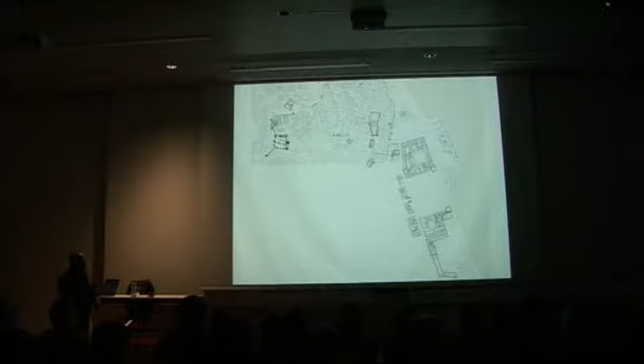This drawing shows the monumental scale of the main square facing the water. You can see that this space, even if it's not so big, the two houses we are going to see were in the 11th century very important in Lisbon, because it's the main space of the city at that time. This is the main church.

This was the situation the first time I went there. They found the remains of two houses, Islamic houses, with patios you can see here. The archaeologists had remade the walls, because the walls were almost nothing, and they made them freely with the same stones they found all around, wanting in the competition a protection for these two houses.

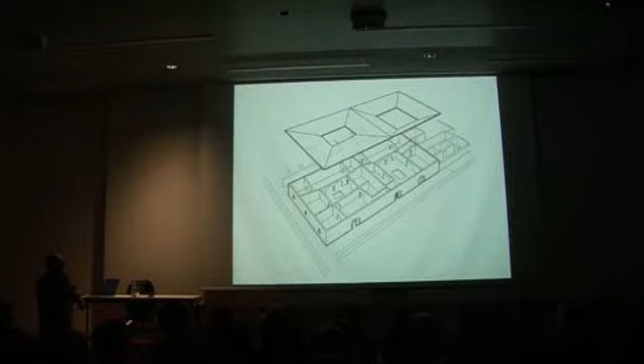This is the model of the existing excavation. Here you can see the two houses. This was a drawing by the archaeologists, a kind of conjecture of what the houses were, and we thought it was interesting with a certain abstraction of some of these details to protect the ruins with a very big model in real scale that can make us imagine the inner spaces and the patios, and also protect the ruins that exist there. Since they found frescoes in these very big rooms, these rooms must have been beautiful, and it was very important to protect these spaces.

So this is the first model we have made. The idea was to build this in a very light way, as if supported by 6 points where we had not found the remains, and with this to explain the houses that existed.

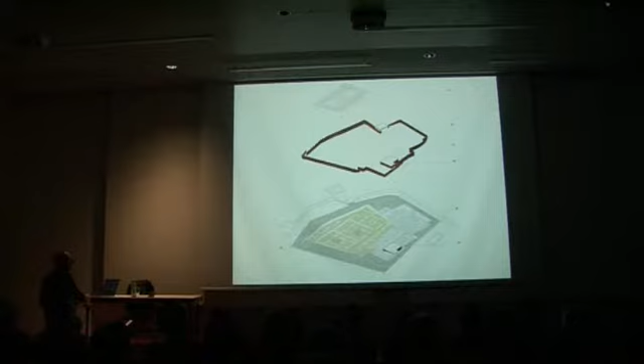This is the drawing of the two houses with the patios, and this is the wall to define the space we were going to display. This is a space to walk around, paved with the stone of the city. A more detailed plan. A more detailed model.

It's very important that the existing walls are very well protected, but the structure is reversible and never touches the existing walls. After construction, we have always 15 centimeters between the existing walls and the model we have made. And this is the system to protect the difference of levels. This is a very beautiful space with the castle all around. We arrive from stairs that exist here, and we see this space from the wall.

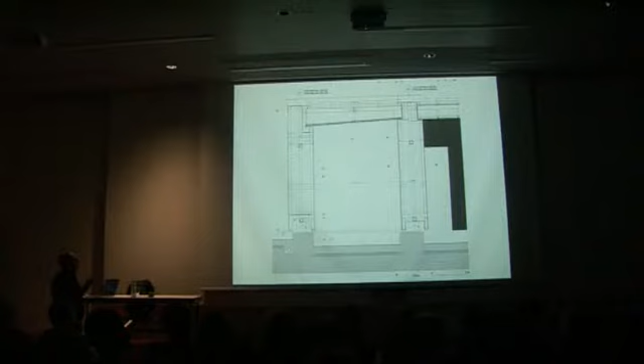During the construction, usually at this point, everybody thinks this is not allowed. And finished. This is the competition. Now I finished the construction project, and next year maybe it's going to be built.

Now we were in the castle in Lisbon, and this is the intervention area for the competition for the cruise terminal. This is the area we have seen in this plan of the 17th century. It was inside the water, in the same plans we have seen.

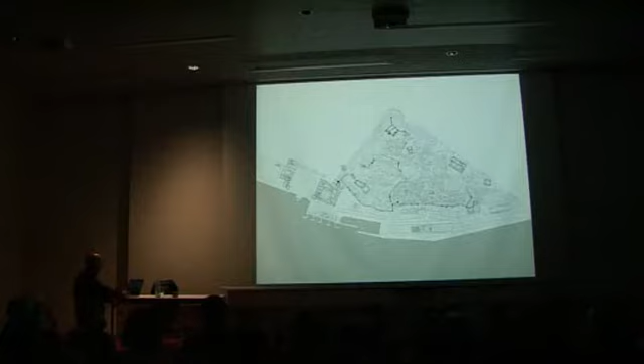Also these spaces we are going to build, when the cruises are not arriving, we can use them as spaces for other activities. This is the ancient city, a kind of amphitheater or auditorium looking to the water, to the river. And the idea was to inverse this site and to put the building looking to the water and also to the old city.

I thought this was an occasion to create spaces mostly for the city, to reveal the presence or the memory of the dock, and to do the building with a very big freedom, because we were inside the green park and beside the water.

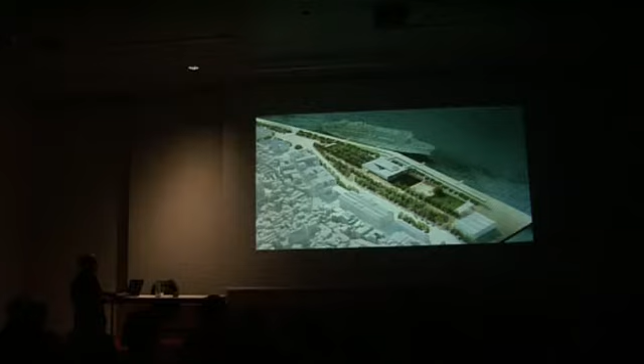These are some drawings of the competition and photographs of the models. And this was the other photo montage they asked for, to understand the relation of the building with the ancient city, that is very beautiful, as you can see.

And these are always images from the competition that are now not completely updated. But we can imagine that the relation between the ships and the city is much more important than whatever we are going to build in the space between.

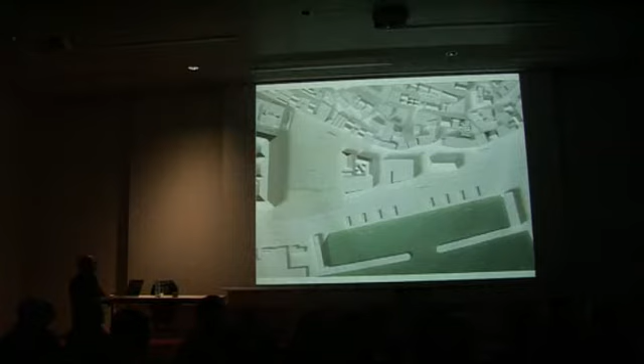The idea is to protect a little bit the square from the traffic noise, and then to create a space with pine trees, with this opening to the Saramago Foundation, and with the very different trees on that side. These are the volumes that now we are not going to study, that they are not going to be built. And what we are studying is a parking area only a little bit underground, but that creates a kind of protection to the noise of the road. And then this inner space very open to the river and to the city.

This is a section in the competition with the pine trees. And the other section here is the river, and you see it's a little bit deeper, the square with the pine trees and the different trees the other side.

This is the bookshop for the Saramago Foundation, with this caryatid that is an elephant. This is the form of the square and the bookshop.

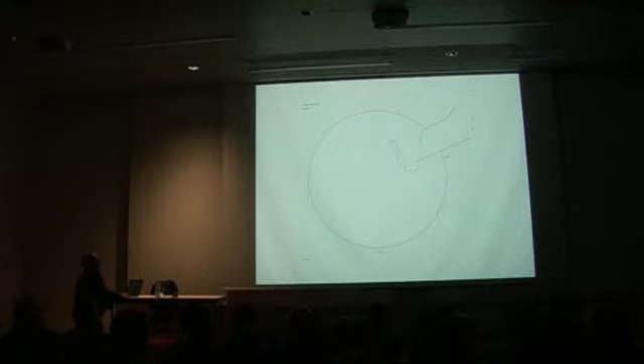It's a very simple figure, let's say. The base was built with concrete, but separate from the pavement, and with lots of things inside to be easily demolished. It was put in place during the night, and in the morning was like this. This is a beautiful site.

And then we put a very light structure with a kind of plastic mirror. It's a film that reflects, and it's in tension with this frame, this steel frame. As you can imagine, it was a very big attraction because people from the outside, in the mirror, they seemed very elegant, and inside they were very, very fat but very happy. The effect was incredible.

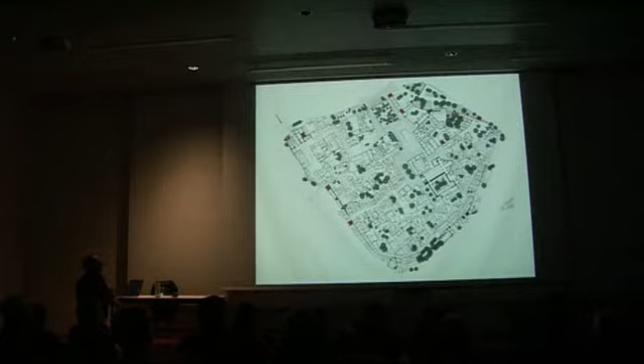This is the plan we have made with all the ground levels of the buildings of the city, with the wall. And this is the area of the Roman temple.

We thought that it was interesting to introduce the pine trees and the cypresses to create a kind of image that we can see from the outside, and that creates a kind of clear image like the old cities in the Mediterranean area. In the upper areas, lots of times they have this kind of trees. And we thought it was very interesting to begin with this.

The temple, in 1037, was built and rebuilt, as you are going to see in the next image. And in the 20th century, they demolished everything that was not Roman. And the ruin remained like this. It's beautiful. This is an ancient photograph.

But since it has a very important position in the center of the old city, it has a very strong presence. And this was an ancient photograph without the stones all around, with the earth, with the stones. But we always see that something of the ruin was maybe not so correct, because the ground was maybe here at this level.

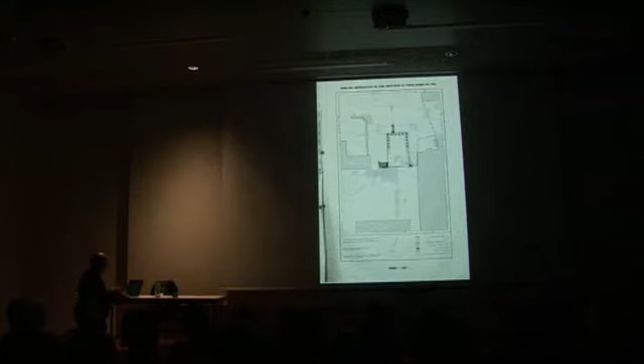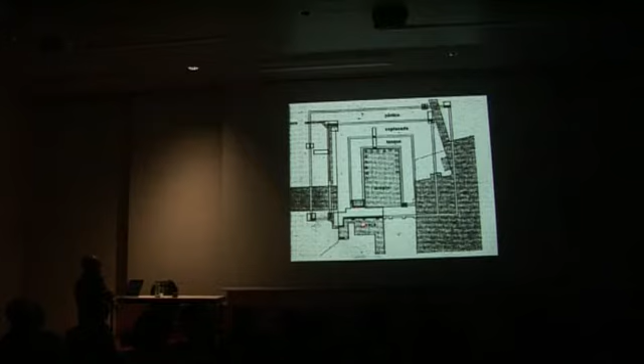This is another drawing of the archaeologists trying to understand the space. These are the excavations they have done, trying to understand the space in Roman times. And this is the only photograph we have of the excavation with the tank.

We thought that maybe this idea of reflection was really interesting. This is the actual situation. We would like not to have this and to put the protection at this level. We thought that maybe we can do it with a kind of artistic installation.

If we keep everything that is underground and we put a kind of steel tank with very little water exactly at this level, but in a reversible and ephemeral way, just as if it was an artistic installation there.

This is the model we have done. The idea is to go down one step from the stone to the earth that surrounds the temple, and then to have this kind of mirror made with water that reflects the ruins and protects also the ruins from the intrusion of tourists.

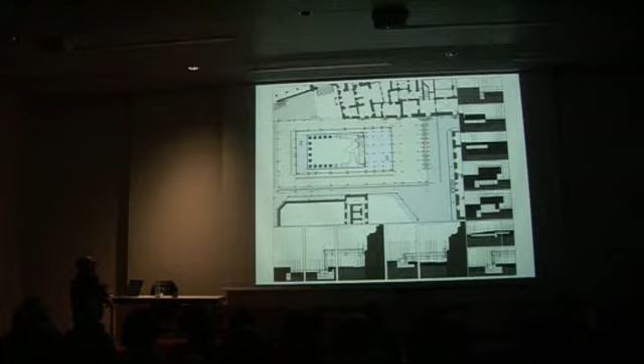The city of Covilhã is between the mountain and the valley. They asked me to work within a plan made by an architect from Lisbon, in his 90s, whom I like very much. He was doing a plan to create the possibility to walk in the city using means like a pedestrian bridge, instead of having to use the car.

This is a kind of schematic explanation of the project, where you have the mountain, the little valley, here the historic center of the city, and then the huge valley, Cova da Beira, that is very fertile, which we are going to see.

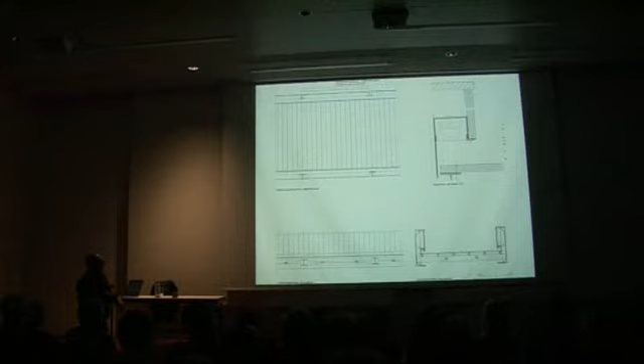During construction, now you can see a little bit of the huge valley, built and rebuilt by man with walls of granite. In this picture it does not seem so beautiful, but it really is. And this is the side of the historical center, which you cannot see because of the banal buildings all around.

Here you see the bridge with the mountain and the valley. The bridge is painted white, 225 meters long with columns 1.70 meters. This works as if it was a sheet of paper with these impossible dimensions, because on the intradorso of the bridge you have the black color.

And these are the ugly columns that are going to be recovered by nature one day.

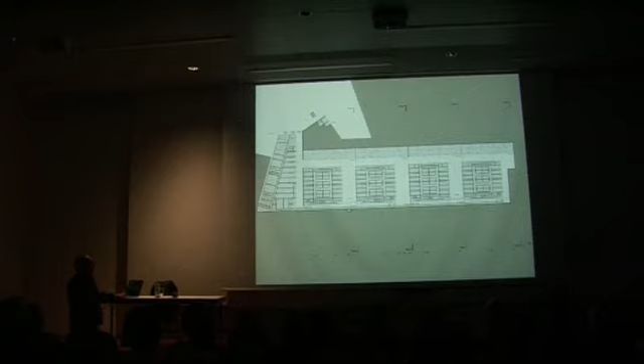The concept of putting the water is something like this dam in the mountain. And the organization is completely incredible because we have to be sure that we always have the power, the electric power, and we always have the possibility of getting out the calories by free cooling.

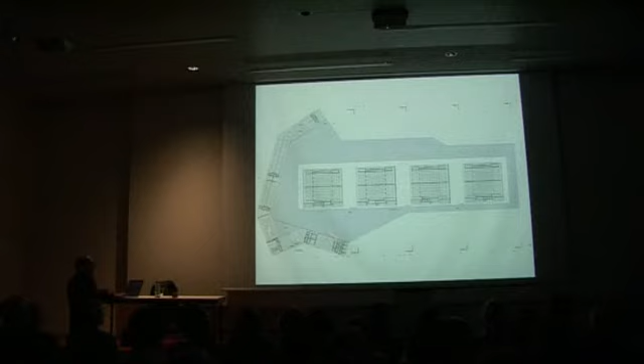This is the main levels with the free cooling on both sides and the computers in the center. And here the working spaces. Under the water we have all the work that has to be done to maintain the technical buildings. And here we have people working.

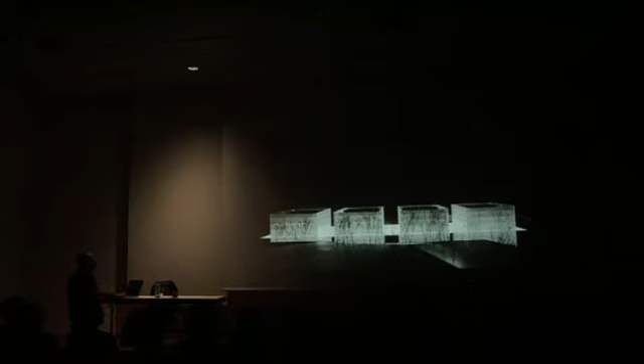This is a drawing we made in the beginning with the mountain and the buildings. And the building is more or less, the plan is a square, and the height is half the square.

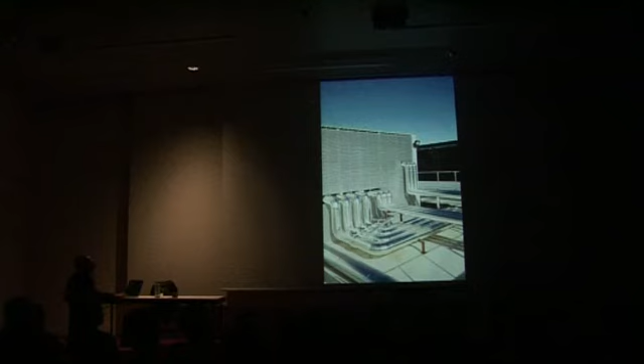And that's all. Thank you very much.